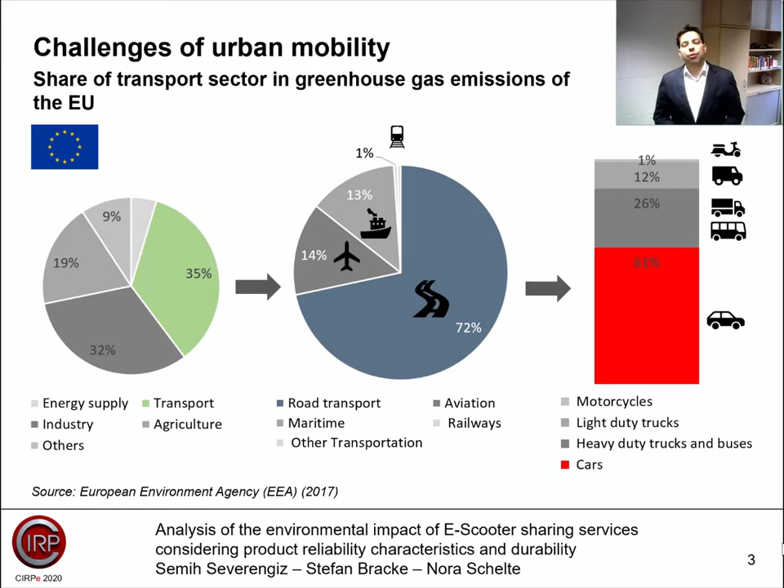Greenhouse gas emissions are one of the major challenges caused by transport. This slide shows the greenhouse gas emissions of the European Union. As you can see on the left, the transport sector is responsible for 1/3 of all emissions. Nearly 3/4 of transport emissions are caused by road transport. Passenger cars have a share of 60% of road transport emissions. Therefore, it is quite important to find alternative mobility solutions for individual transport with cars.

One possibility to foster new mobility systems are e-scooter sharing services. E-scooters are touted as an ecologically advantageous mode of transport by sharing providers, as they could be a solution for the last mile of public transport and do not have direct tailpipe emissions. However, e-scooter sharing has potential disadvantages like the collection of e-scooters and batteries by service vans. Moreover, previous studies on e-scooter sharing have shown that the environmental impact is significantly affected by their short lifetime.

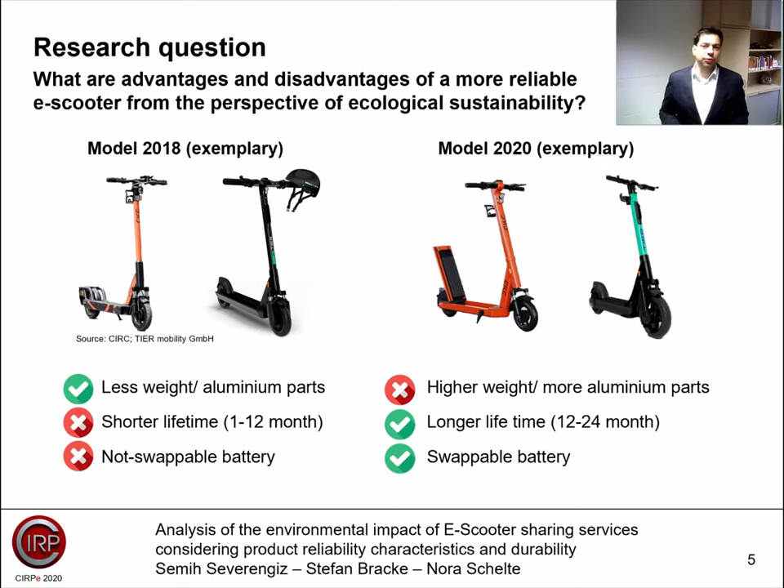In our study, we analyzed what are the advantages and disadvantages of a reliable e-scooter from the perspective of ecological sustainability. Therefore, we developed a concept to include reliability characteristics into the methodology lifecycle assessment. Firstly, we developed reliability models regarding the failure behavior of main scooter components based on a synthetic data set. Secondly, we conducted a lifecycle assessment for e-scooter sharing and afterwards analyzed different case studies in the field of innovation cycles and product reliability, the influence of component durability on scooter lifetime and energy demand in production, and maintenance strategies.

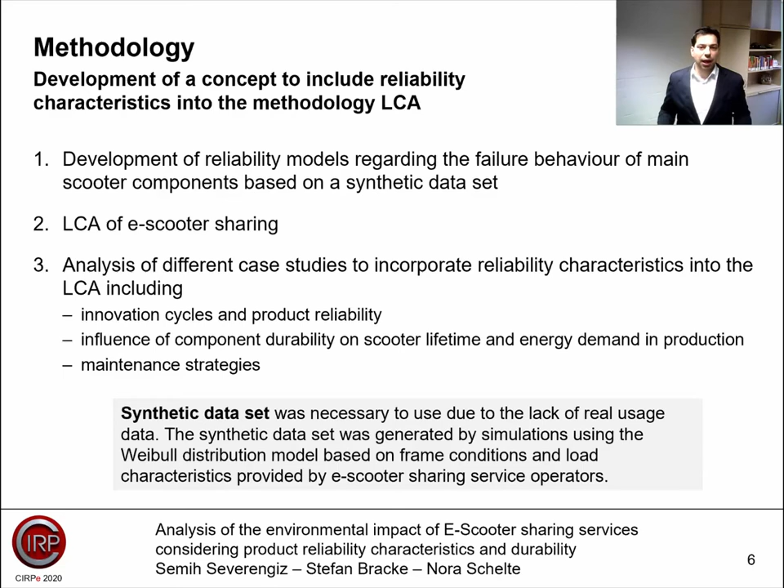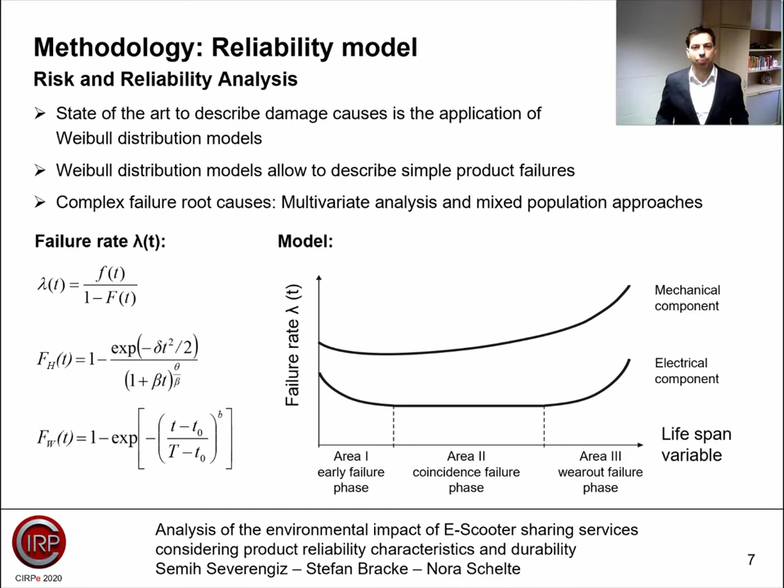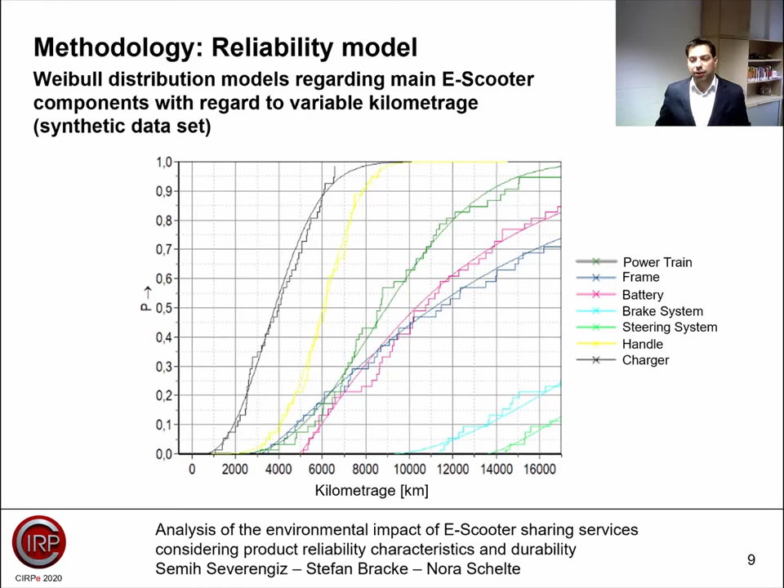This slide shows an overview with regard to the expected lifespans of main e-scooter components from the reliability engineering point of view. The overview with respect to failure behavior of important e-scooter components using Weibull models is our next slide. The x-axis shows the kilometrage, the y-axis shows the failure probability in case of an upcoming failure symptom. I will provide an example. The e-scooter battery has, at a kilometrage of 10,000 kilometers, a failure probability of 48%. These reliability models are important for calculating expected failure probabilities within the usage time. It allows the calculation of spare parts, maintenance intervals, etc., which have a clear impact on lifecycle assessment.

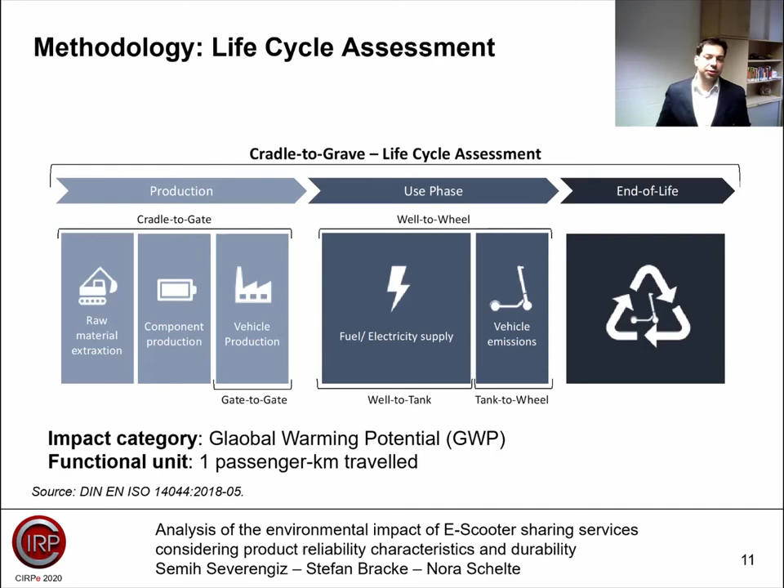Lifecycle assessment is an instrument for quantifying the environmental impact of technical systems or services throughout their entire lifecycle. The goal of this study is to examine the lifecycle global warming potential, or called GWP, of e-scooter sharing in consideration of reliability characteristics. The functional unit is 1 passenger kilometer.

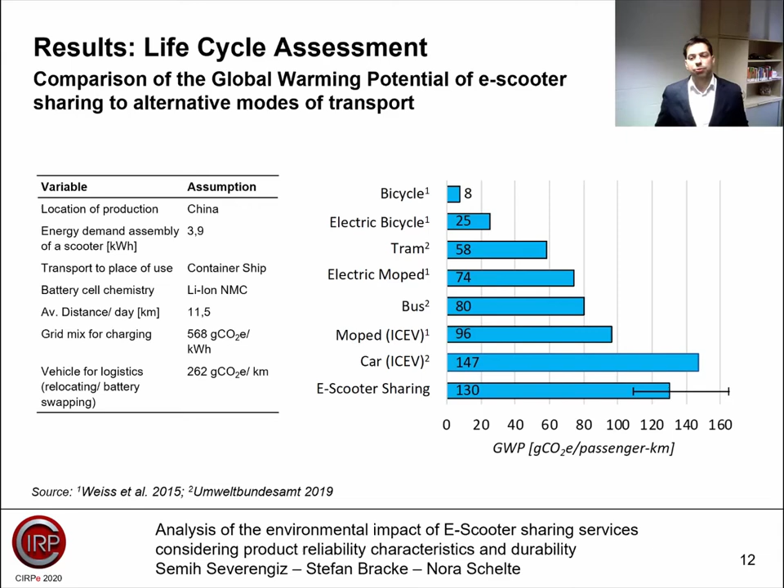And now results. In this slide, you can see an overview of the results of our life cycle assessment. Using the basic assumptions, the GWP of the model 2020 is 130 grams CO2 equivalent per passenger kilometer. Different scenarios, including reliability aspects, result in a range between 116 and 164. In order to assess the impacts of product reliability on the life cycle assessment of e-scooters, we examine 3 case studies as examples, which I will explain in the next slide.

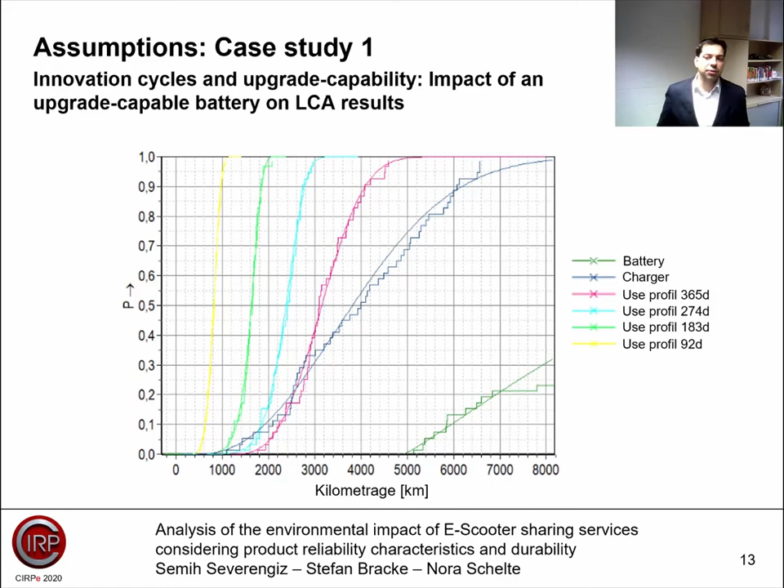Case study 1 shows the impact of innovation cycles and upgrade capability on life cycle assessment results using the battery as an example. The average scooter lifetime is 4,200 kilometers. As you can see, the battery lifetime is longer than the scooter, which has several effects on innovation cycles. On this slide, you can see our assumption for the 4 cases we analyzed.

Currently, scooter models are available with replaceable and fixed batteries. A possible advantage of replaceable batteries is that the battery is upgrade capable. This means it could be replaced by a successor generation of batteries with better range. Since the innovation cycles of scooters and batteries are not synchronous, it may therefore be possible and reasonable to replace the batteries of a scooter sharing fleet even within the short life of the scooter. On the other hand, the battery could be removed from the scooter after the end of the scooter's lifetime and be used in a second life application. In the scenario base case, the battery is not replaceable.

Also, the battery has a lifetime kilometerage of more than 4,200 kilometers. It cannot be used beyond the scooter's lifetime. For the scenario second life for batteries, we assume the battery is replaceable. We assume it is used throughout its entire lifetime beyond the scooter's lifetime, for example in other scooters or new applications like charging stations.

In the scenario 1.3, battery upgrade, we assume that the replaceable battery will be upgraded by an improved battery after 6 months. Due to the innovation cycle, the upgraded battery has an improved range of 45 kilometers. It is assumed the batteries are not used in second life application after the upgrade or beyond the scooter's lifetime.

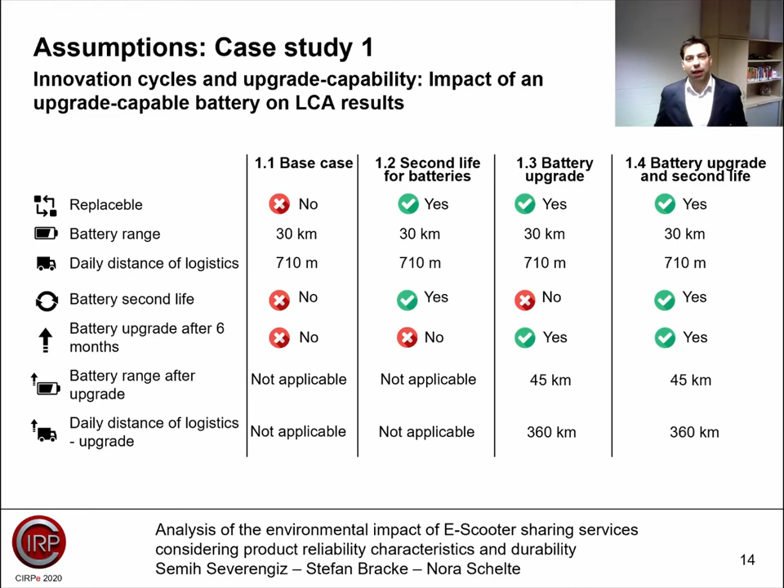In scenario 1.4, the battery is upgraded after 6 months as well. However, the battery will be used in a second life use case for its full lifetime. Here you can see the results of case study 1. It is divided into the production of scooter and battery, transport, electricity demand, and the use phase, logistics, and end of life. You can see that the majority of GWP is caused by production.

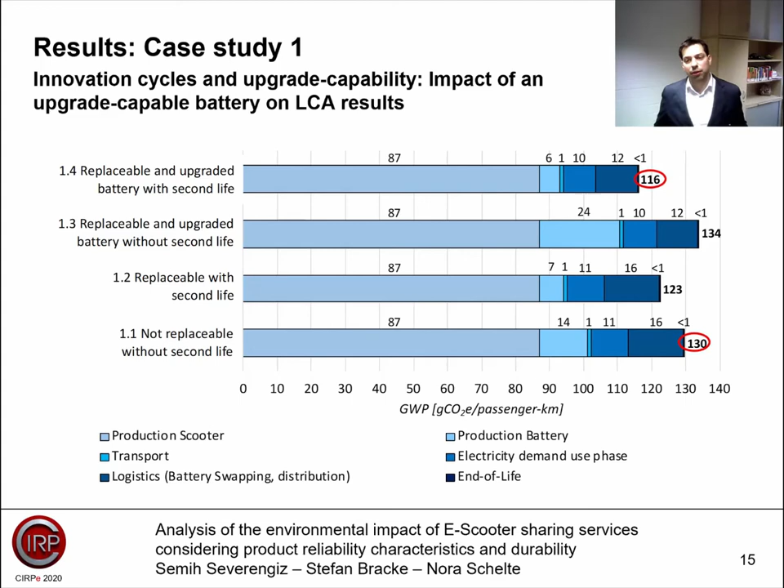The results for case study 1 demonstrate that a battery upgrade could improve electricity demand and logistics in the use phase by 20%. If the battery is upgraded and used in second life, the total GWP decreases by 11% to 116 grams CO2 equivalent per passenger kilometer. And now case study 2.

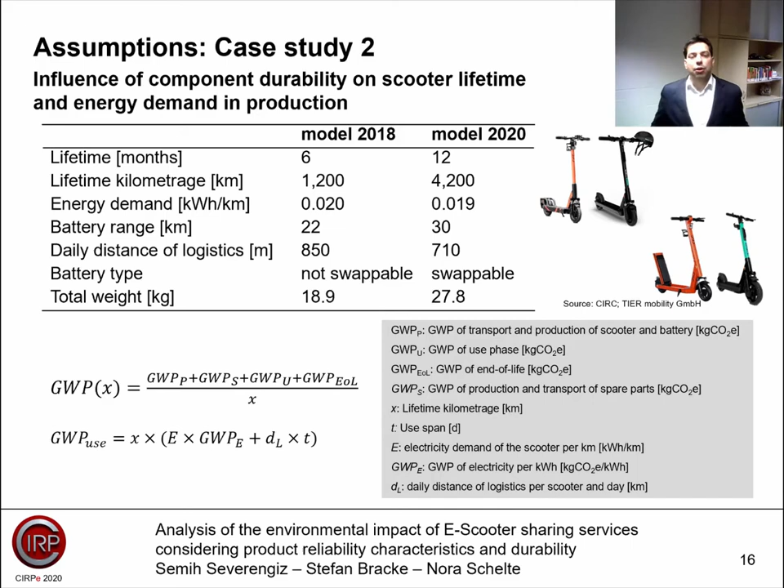Case study 2 analyzes the influence of component durability on scooter lifetime and energy demand in production. As explained before, the lifetime of e-scooters ranges between 6 and 12 months. Compared to the model 2020, the model 2018 has a shorter lifetime of 1,200 kilometers. The battery of this model has a range of 22 kilometers. Below, you can see how we calculated GWP for different lifetimes.

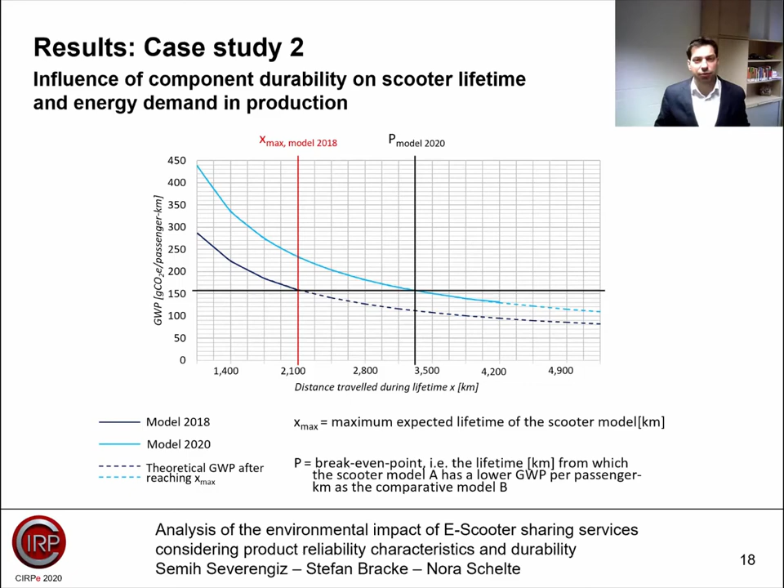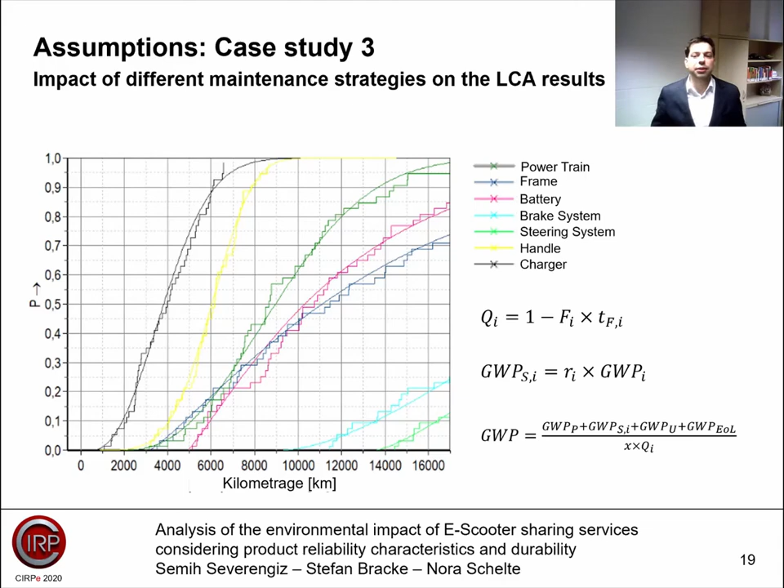And finally, case study 3 compares the impact of different maintenance strategies on lifecycle assessment results. The charger and handle are considered in detail as parts that are likely to fail and need to be replaced during the lifetime of the scooter. The calculation of the GWP is based on the assumption that the total kilometerage of a scooter is reduced by downtimes. It is assumed that the downtime is 30 days if a component fails unplanned and 1 day if it is maintained preventively. In case study 3, we analyzed 3 different maintenance strategies.

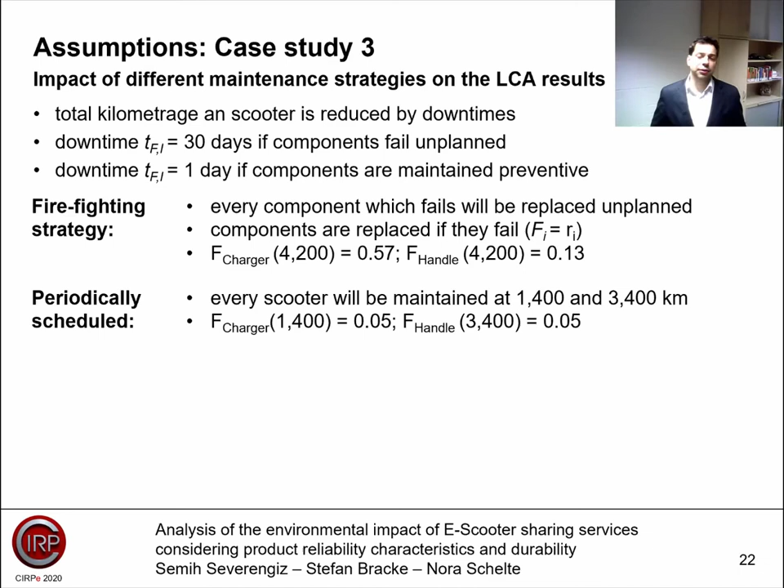In the scenario firefighting strategy, we assume every component which fails will be replaced unplanned. Therefore, the rate of replacement of a component equals the failure probability of a component. The probability of the components charger and handle to fail within the scooter lifetime is 57% for the charger and 13% for the handle. In scenario periodically scheduled, we assume every scooter will be maintained at 1,400 and 3,400 km.

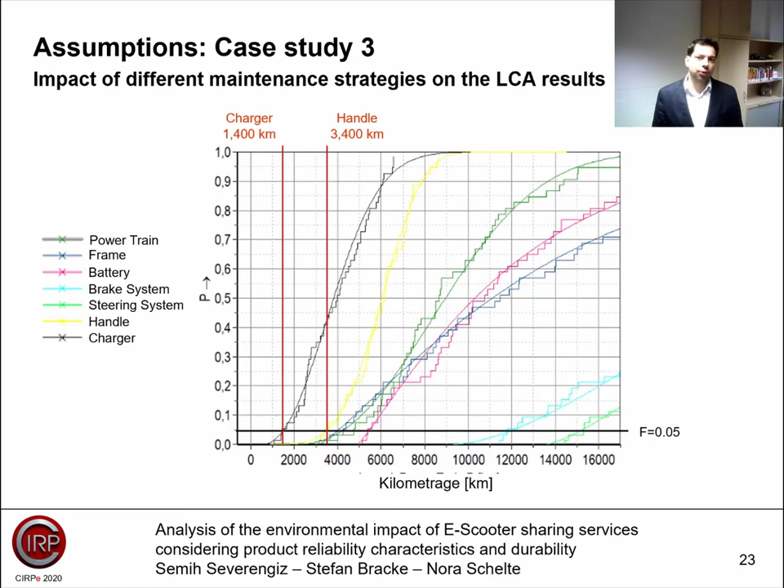We assume that because the failure rate of the charger is 5% at 1,400 km and of the handle at 3,400 km. Therefore, only for 5% of the scooter fleet the components need to be replaced unplanned, with a downtime of 30 days. The rest will be replaced preventively with a downtime of 1 day. However, it is assumed that all components are replaced preventively during maintenance, even if they would last longer.

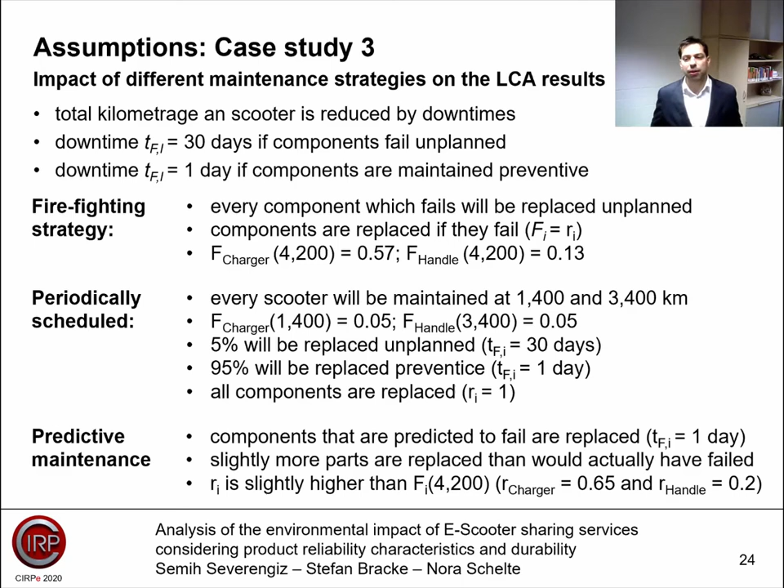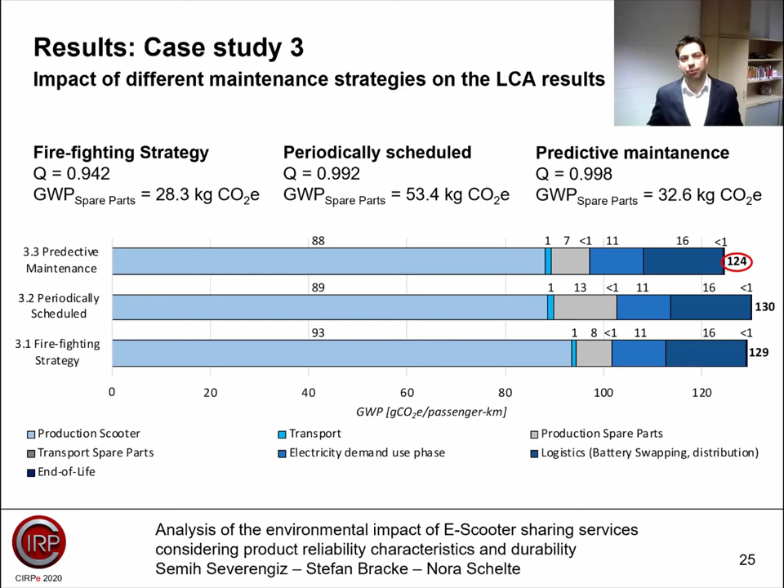In scenario predictive maintenance, we assume components are replaced predictively with a downtime of 1 day. It is assumed that due to the predictive maintenance, only slightly more parts are replaced than would actually have failed. Due to the lower downtime, the GWP of scooter production based on passenger kilometers decreases in scenario 3.2 and 3.3. However, this advantage is outweighed by the high spare parts demand in scenario 3.2. Overall, according to these assumptions and calculations, it is possible to decrease the GWP by 4% compared to scenario 3.1 by using predictive maintenance. And finally, now our conclusion.

We have discussed different examples of how to consider reliability characteristics in lifecycle assessment and lifecycle engineering. We used the example of the battery to outline the contrast between lifetime, product innovation, and environmental impact. It shows that modular, replaceable components have the potential to reduce the GWP significantly, in this case by 11%. However, the importance of using replaced components in second life applications was highlighted. We have demonstrated a high optimization potential in lifecycle engineering of e-scooters by increasing the durability of components without simultaneously increasing the GWP of production.

With regard to flexible mass customization, we have shown it may make sense not to improve the durability of components at all costs. For example, e-scooters in private use are treated more carefully, maintained more often, and are less affected by vandalism. We presented approaches how to include maintenance strategies into lifecycle assessment. It is shown that predictive maintenance can reduce the environmental impact by 4%. Overall, the study was able to indicate a correlation between reliability characteristics and the environmental impact of e-scooter sharing. However, product reliability should be further investigated in future studies based on real data. Furthermore, it is recommended to analyze the impact on other ecological as well as economic and social aspects.